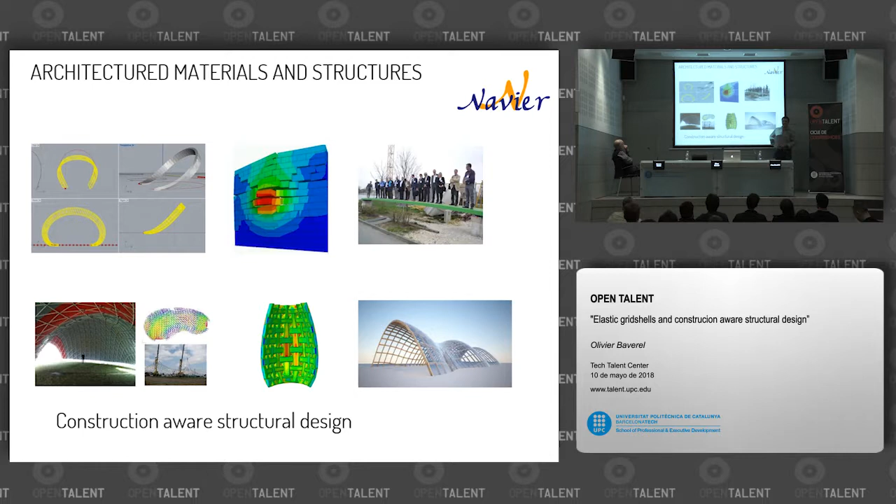So within the Navier lab, there's a team which is called Architectured Materials and Structures, where we work mainly on what we try to call construction-aware structural design. I'm going to detail this, and my presentation will be mainly about this.

So within the École des Ponts, the strength is that we have a lab specialist in structural mechanics, and also in material science, and in life cycle analysis. We have another lab called Gaspard Monge, which is expert in computer science, in vision and artificial intelligence. And we have a company called Al Robotics that is working with us on sensors and controls.

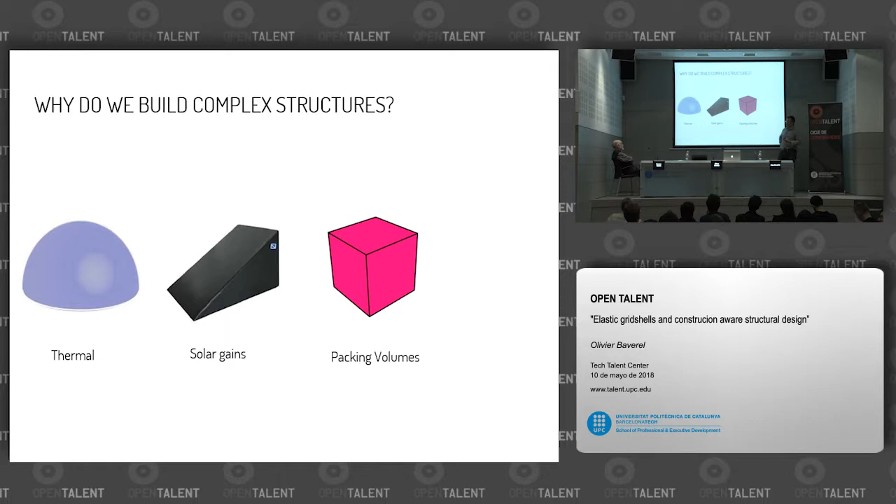So let's go first into why we do complex structures, why we build complex structures. Because obviously making a cube is not the optimum. If we want the structure with the least thermal bridge, the best is to do a hemisphere. If you want to get more solar gain, you should make a 45 degree angle with the south. If you want to pack some volumes, then you'd better do some cubes or parallelepiped rectangles. And if you want to do structure, then life is much simpler if you do tetrahedrons. And of course, having only the optimum of each solution doesn't give you the global optimum, and you have to find a way to find a global optimum.

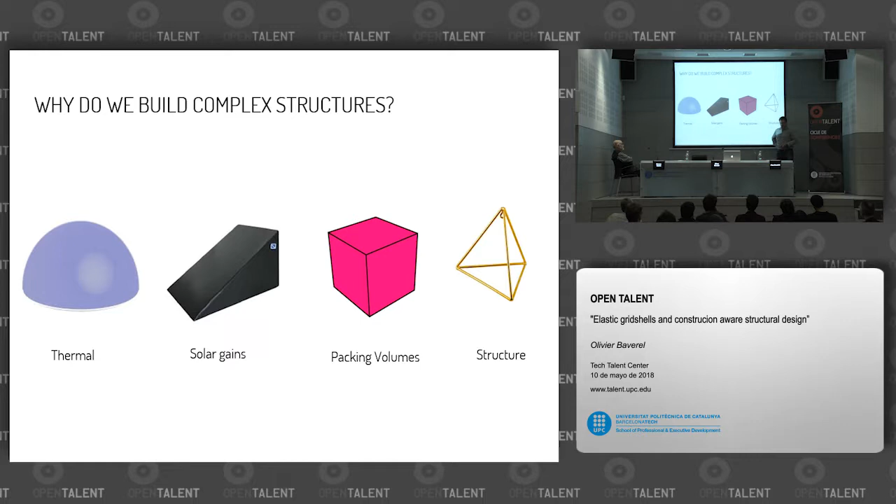And a global optimum for what? Well, it's certainly for sustainability. You all know that our consumption of any material is getting into an exponential curve, and we have to reduce this consumption within a very short time if we want not the planet to survive, but humanity to survive. The planet doesn't care about us. It was there before us, and it will be there after us. It's just a question of humankind.

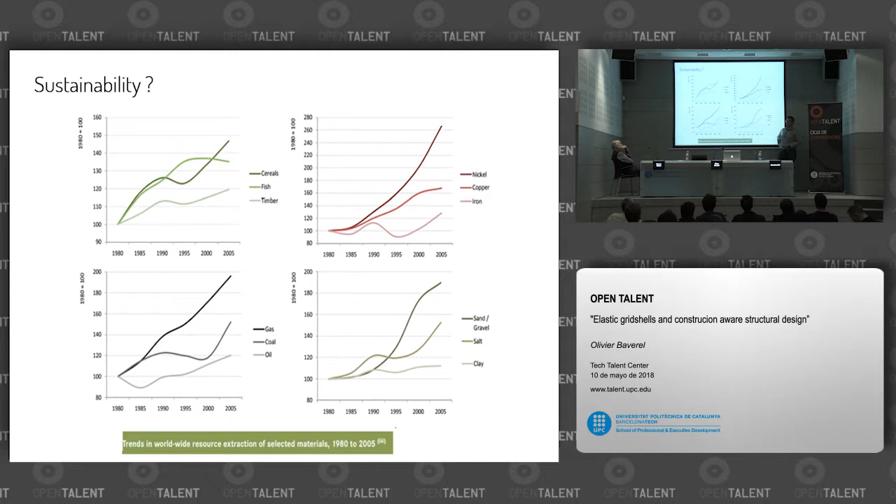So we strongly believe that construction-aware structural design will help. It's not a complete answer to the problem, but it will help to use the resources better.

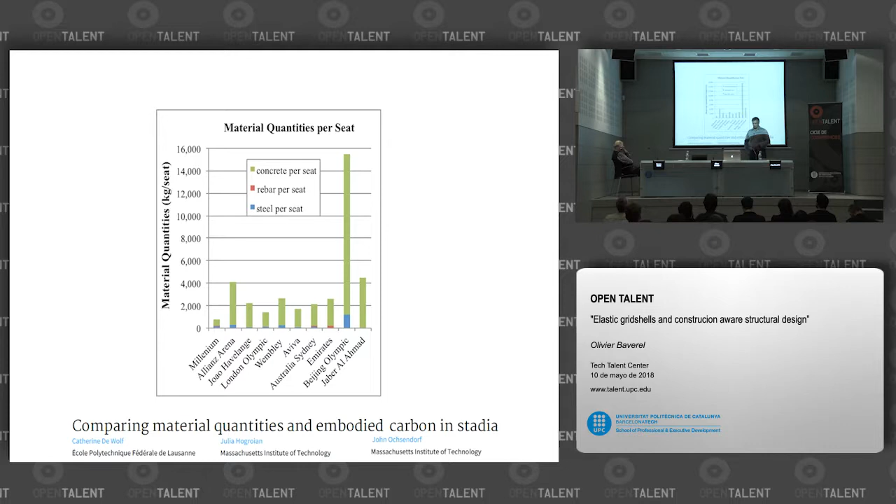Having said that, if we look at a latest publication from Catherine De Wolf from École Polytechnique of Lausanne in Switzerland, she looked at stadia, and she looked at the amount of material used to build the stadia. And you may know the beautiful stadia from the Olympic games of 2008 in Beijing. So in terms of complex structure, we're not yet there in terms of consumption of materials.

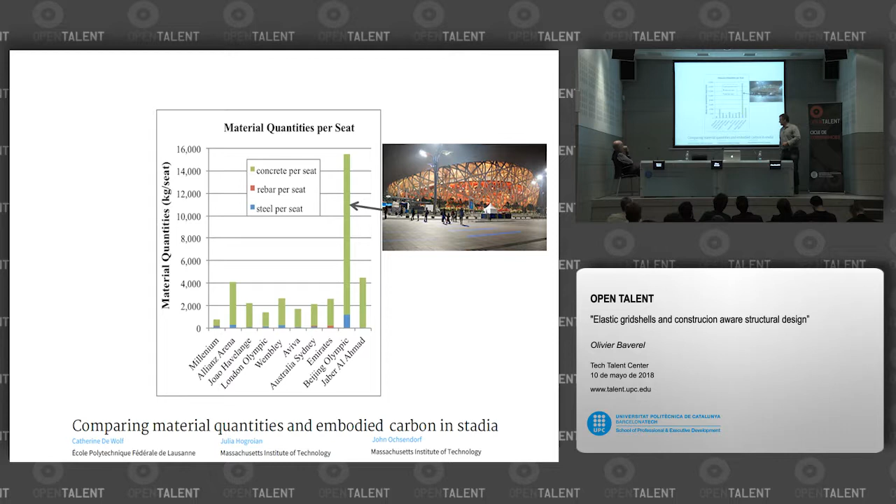Well, if you look at the stadia of 2012 in London, it was far much better. So people understood that using modern tools, you need to get some optimization, not to consume too much materials. Remember, or maybe you are too young, but in 2008, the price of steel in the entire world increased. And all the big companies of Europe lost some money because the price of steel went up due to the building of this stadium.

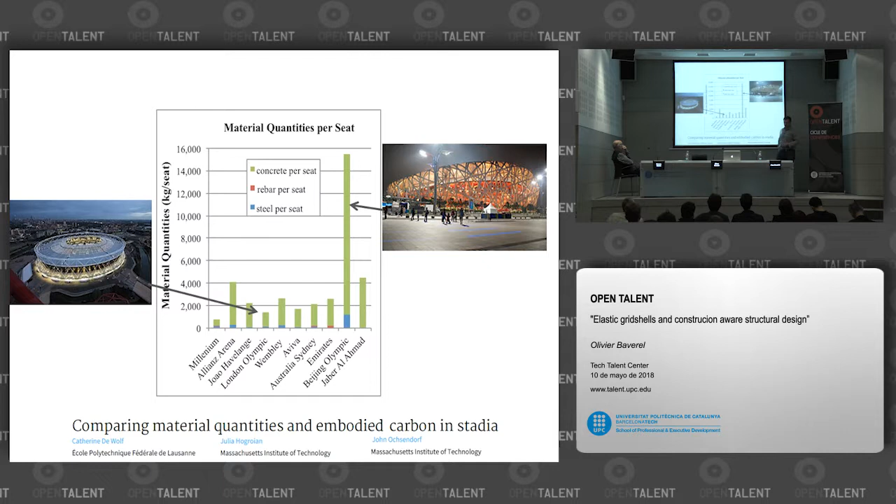I could also show you the CO2 emission graph, and it's the same trend. So our proposal is to investigate better the mechanics of materials and use the materials efficiently. It's also to revisit the roots of geometry, because at the moment we're using tools that are not adapted to what we want to do. And of course, we want to cleverly use digital tools and artificial intelligence. This will be the last part.

We're building and doing many things at the moment, and we're destroying them at the end, getting into raw materials at best, or they get to a dump. Can't we reuse directly elements to make and save and have a better life cycle analysis?

So first, think mechanics of materials. If we look at the first iron bridge that you probably all know, it looks mainly not as a steel bridge, but mostly as a bridge of masonry. So a new material came out, and they copied the solution of the previous materials.

We had to wait 50 years and even more until Navier developed the beam theory equation that you all know. And 50 years after, you had Gustave Eiffel, who built bridges that optimally use the materials, with trusses or even trusses within trusses, to get a really lighter structure. So it took some time to do it, and it was not straightforward.

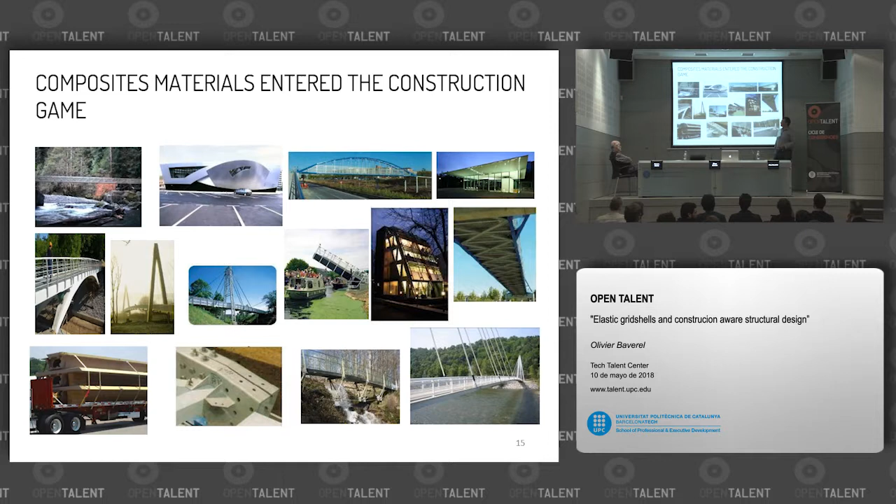If we look nowadays, new materials that came into our industry are composite materials, mainly glass fiber, which is quite cheap, or carbon fiber. But if you zoom into all these details, it's mainly copying steel.

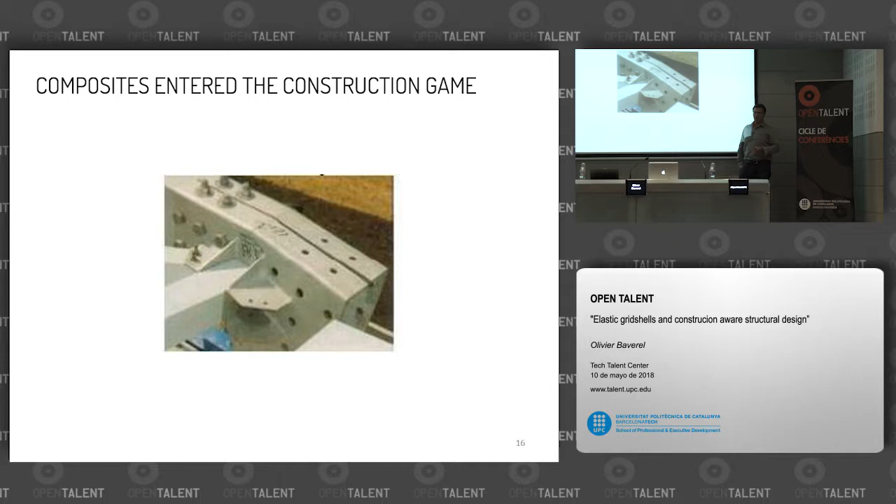But you all know that steel has some fantastic properties, which are elastoplastic, and it's not a brittle material. Composite material is a brittle, fragile material, and not ductile. So you cannot copy straight what is built in steel directly in composite material, or you will never win. Steel will always be better.

But there are some strengths in composite materials: lightness, the capacity of prefabrication. You can integrate some functions, for instance optic fibers, to know what is stress within the structure at any time. And you don't have any problem of corrosion.

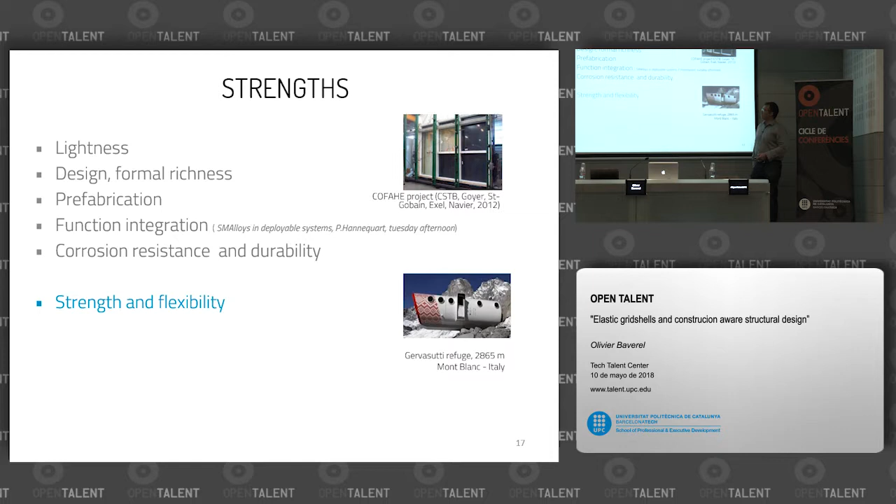But you have to remember that these materials have a low Young modulus. You have to remember that most slender structures made out of steel stand due to the Young modulus, or the rigidity of the material. Here we have a material which is more or less 10 times softer than steel, so you cannot directly compete against steel.

Of course, there are other problems. It's difficult to actually assemble, and there's no ductility, as I mentioned before. So you either copy what is done by steel, and then you will never do better than steel, because the solution provided by steel is optimized for steel. So with composite materials, if you copy steel, you will not do better than steel. You need to find a proper way to use composite materials.

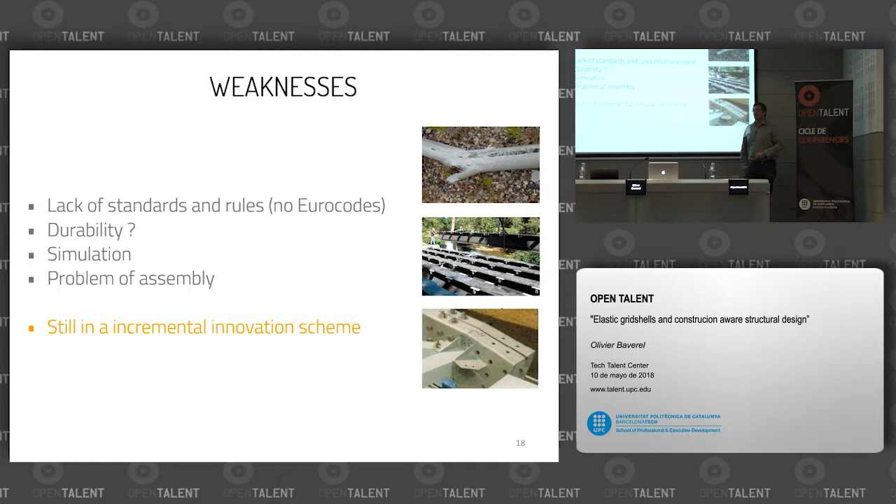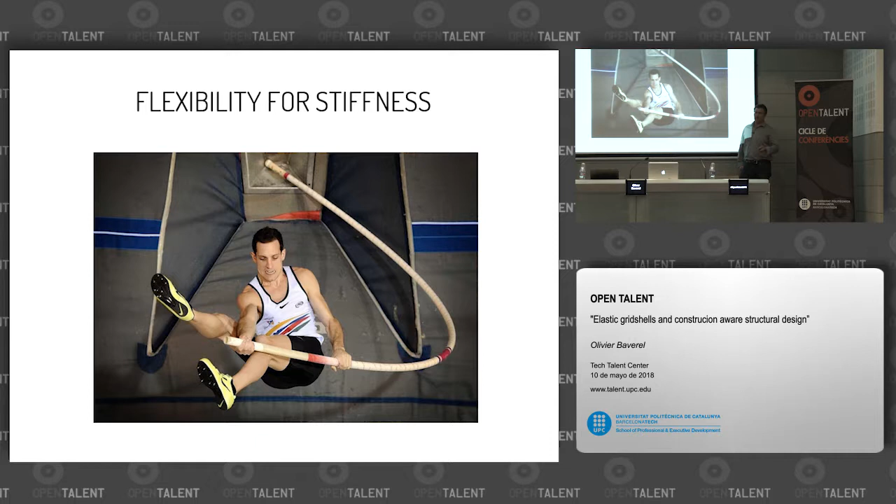So here's an interesting example: you can always try to do pole vault with a steel pole, but it's not going to work. So you have to take advantage of flexibility, certainly for stiffness. One famous solution is to do an elastic grid shell.

As you all know, you start from a flat grid here, which you could look at as a membrane without shear rigidity. This means you can access a vast variety of forms. You get your 3D shape.

Of course, nowadays, tools are available and easily usable to make these forms. And after, you brace the structure. Here you have a structure made of several arches working together, and here you have a shell.

And the shell, by adding only 50% of material, you will have a shell which is between 15 and 20 times stiffer. So you change your structure, and you completely change the stiffness of your structure.

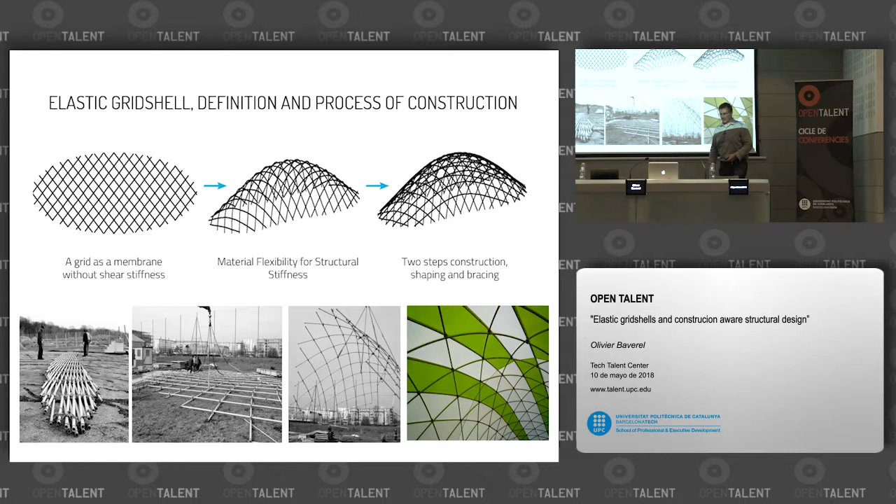So here are some pictures of structures we built in 2005 and 2006. Here it's a crane, but at the beginning we used to lift it by hand, and it was difficult. So in the last 15 years, we had many tries doing some useless things.

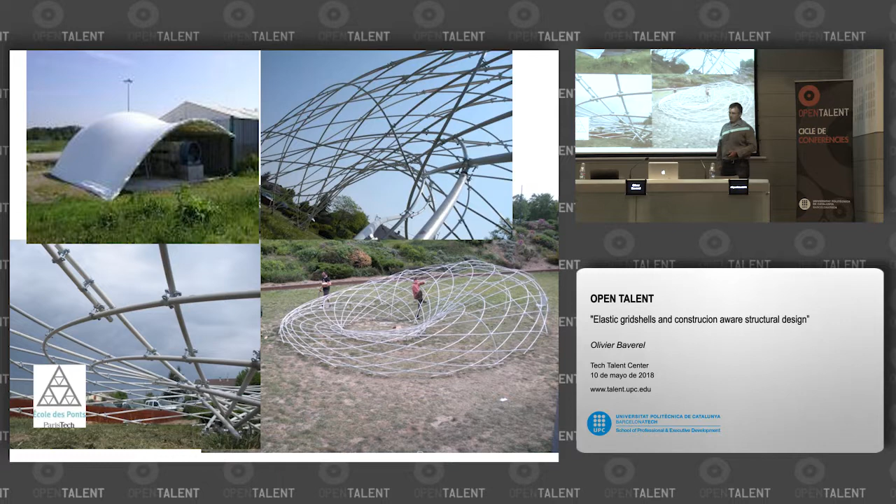So we did many tests here to know actually what is the best, the maximum stress we can allow to these elements. Remember that for those of you who have designed steel structures, you know the yield stress of steel. You put a little coefficient of safety, and then you can design a beam. Here, the coefficient of safety is 3.

It means you use only around 30-35% of the capacity of the material because of many safety coefficients that are needed. So when you look at only the fiber, glass fiber can be 2,000, could be 10 times better than steel in terms of strength. Well, when you make the materials, then it's only twice better than steel. And when you look at the stresses with the coefficient of safety, then it's lower than steel, okay? That's in terms of strength, not in terms of Young modulus.

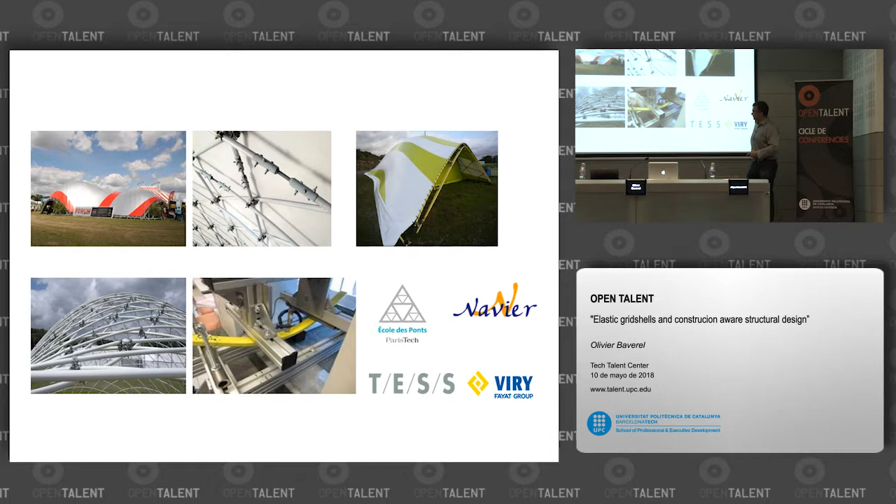So to resume, we did many prototypes. This one is the most famous one we did 10 years ago. We did a real prototype for Solidays Festival in 2011, and we did a temporary cathedral of Créteil in 2013.

We also did many other little tests, for here, a hybrid structural skin. So you know that making a grid and getting a 3D shape is not difficult, but it takes a lot of time to do the bracing because you have to get into the structure and also put a cladding on top of it.

So here there's a grid shell, and on top of it there's a 1.5 centimeter high-strength concrete with our specific formulation from the École des Ponts.

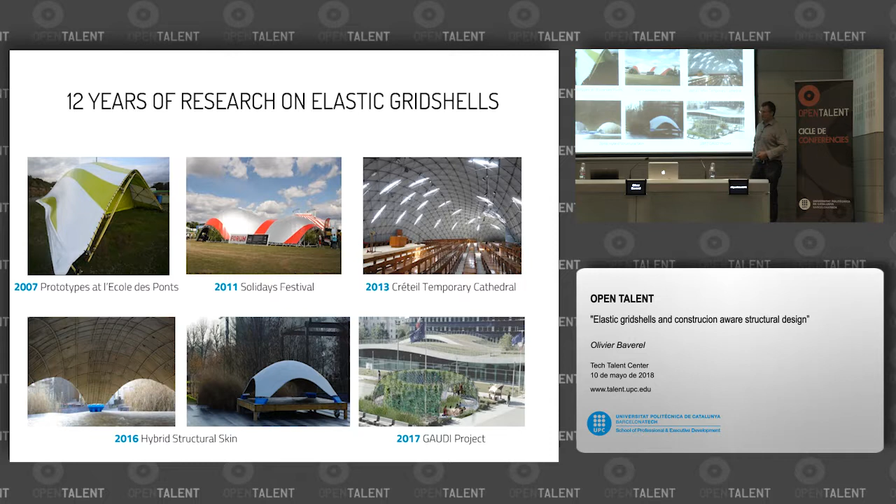Okay, so here's an internal view of the Solidays Festival structure. It's always interesting to see the path of the elements, which is not following geodesic or whatever. And it's also important to know that we span more than 14 meters with a cross-section of 4.2 centimeters in glass fiber.

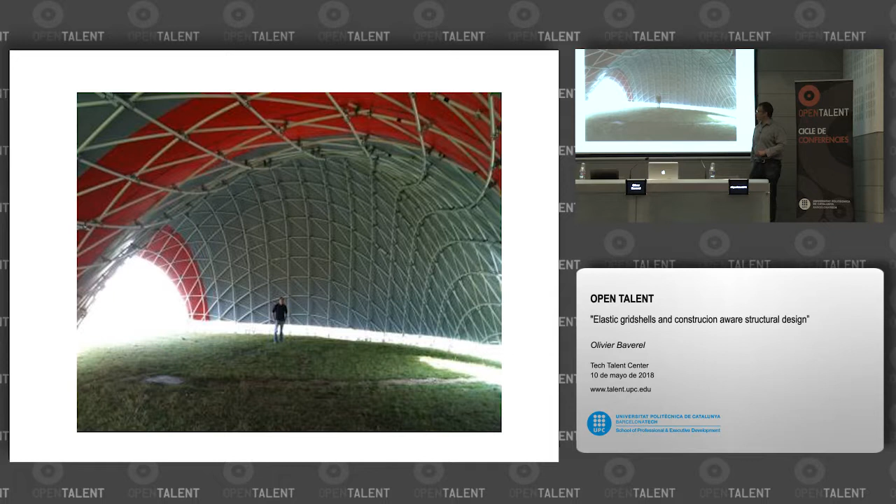So I think it's good to remind you of the design procedure of this structure. It goes in 4 steps. The first step is to get a 3D shape, then mesh it, relax the mesh, and then do a classical structural analysis calculation.

As with many projects, we started to do a mesh on a flat surface and used to push it, and then you'd get an uncontrolled 3D shape. An architect asked us to do a certain geometry, and we told him, well wait, because we have to find a way to get your shape from the flat surface. So you have to do a sort of reverse engineering. And this was not just difficult, it was almost impossible.

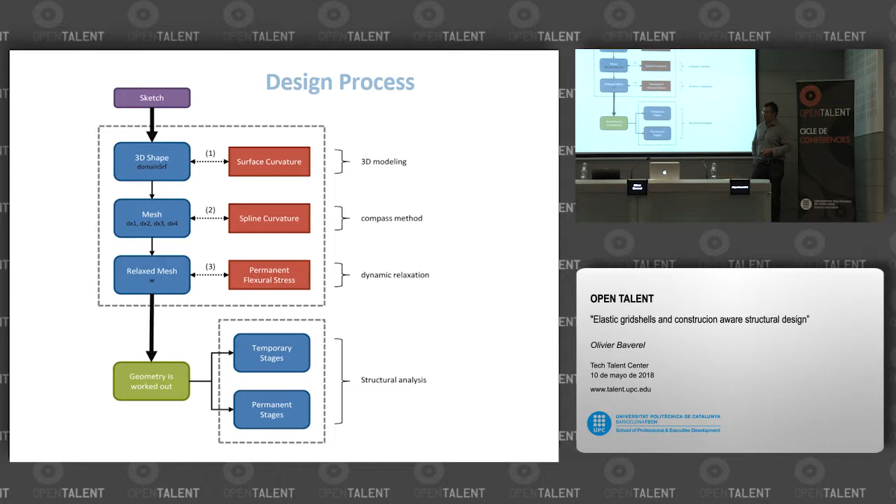So the best way to work is to find a 3D shape given by an architect or a designer, and then mesh it. And this is the main point. So you do a 3-dimensional structure, if you want, or whatever.

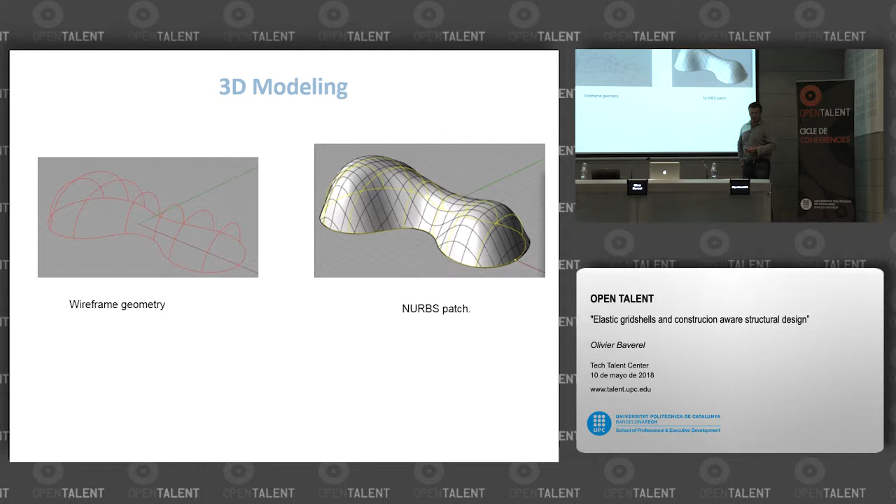But how can you check that this geometry is buildable? If you have to run the whole process, then it's going to take too long. So there's a simple check: it's to look at the global curvature of your structure.

And if you look at the global curvature, knowing the cross-section of the element you expect to use, you know the radius of curvature, or the minimum radius of curvature you can allow. So just by looking at the Gaussian curvature of your structure, you know whether you'll be able to build it or not, or break the element while you put it in shape.

So that's a first step. Without much calculation, you know whether you can build the proposed geometry.

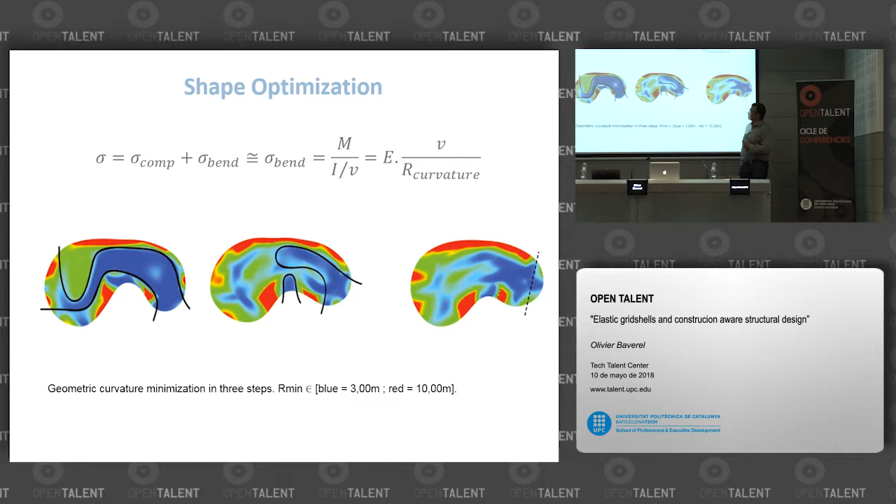Okay, so that's important. Well, this was the first shape. We corrected the shape in order to have a curvature that was not too small, using of course the simple Navier equation.

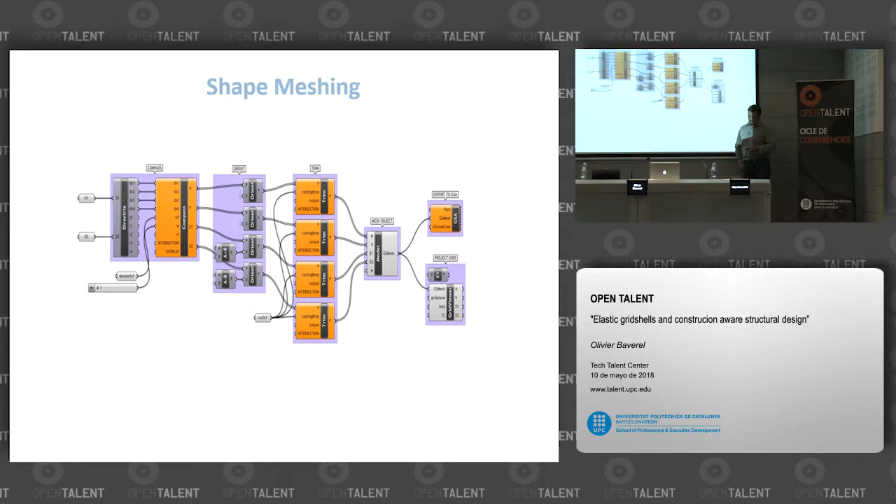That helps to work directly with the designer on the shape you want to use. You can work in real time. And once the shape seems okay, then you have to mesh it. So we made our own tool using the compass method developed by Frei Otto. You choose 2 lines, and then you have to extend the surface you made in order to be able to mesh it.

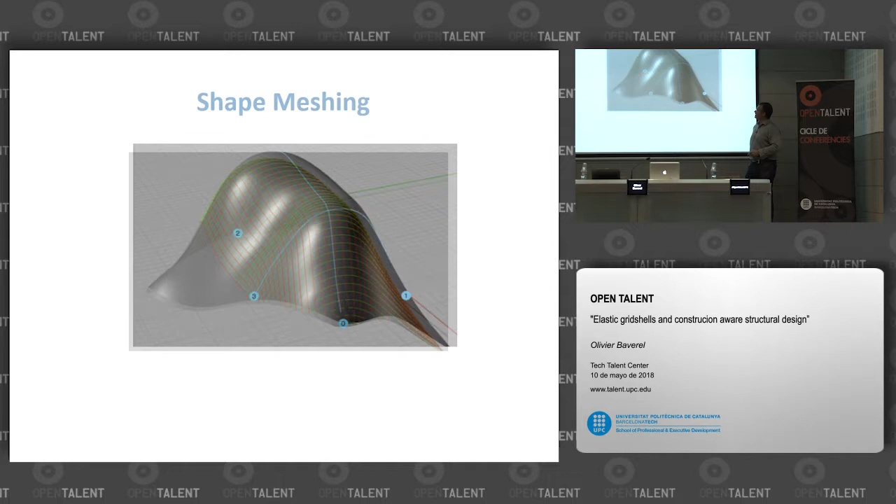Once you mesh it, you cut at the plane you expect to build it, and then you have your structure.

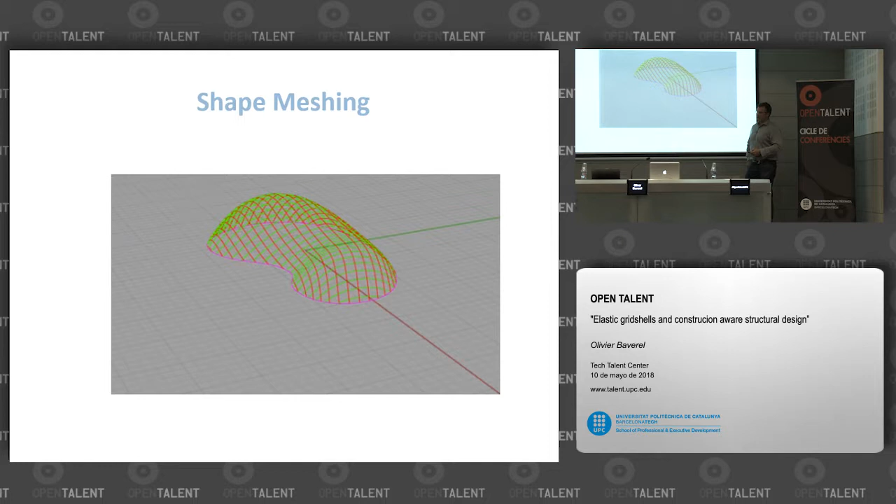You see there's no automatic strategy to mesh your structure. You can choose these 2 first lines, and it will give you a surface that can be meshed or not. Here you see we had a high concentration of bars, and it's completely useless, not interesting at all, so that's why we didn't take this solution. We took this other solution instead, which is far better.

There's no automatic tool yet to find the correct mesh. And an important question is: can I mesh any surface? As you may know, the École des Ponts has many mathematicians working with us, so we did a PhD on this topic: can I mesh any surface?

You have to know it's called a Chebyshev net. Chebyshev was a mathematician working for the Russian army, and he was working on clothes, how to cut the clothes. Because at the end, your clothing is a grid shell. And you can see that you cannot do any surface with a grid shell, because sometimes you have to sew.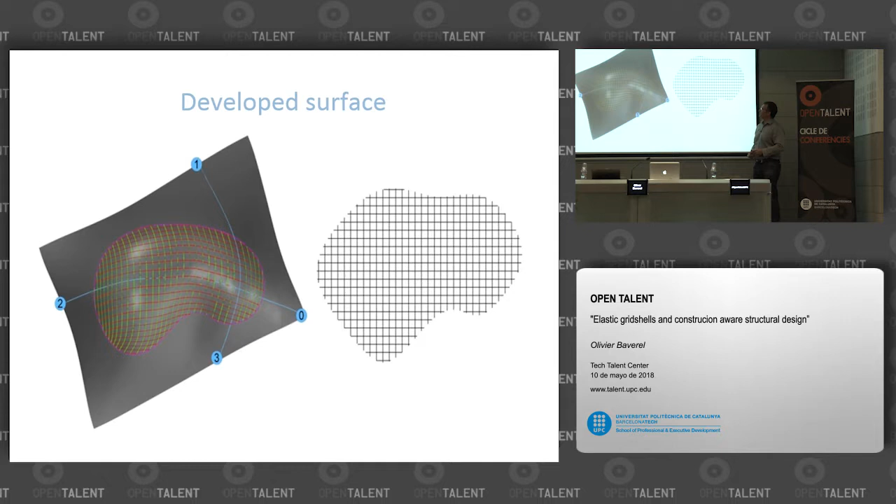After you do that, you have to relax the energy, the bending energy you have within the structure. I won't show the step, but usually the structure does not move too much. Once you have relaxed the bending energy, then you can do a structural analysis, taking into account the bending energy you already have due to the bending.

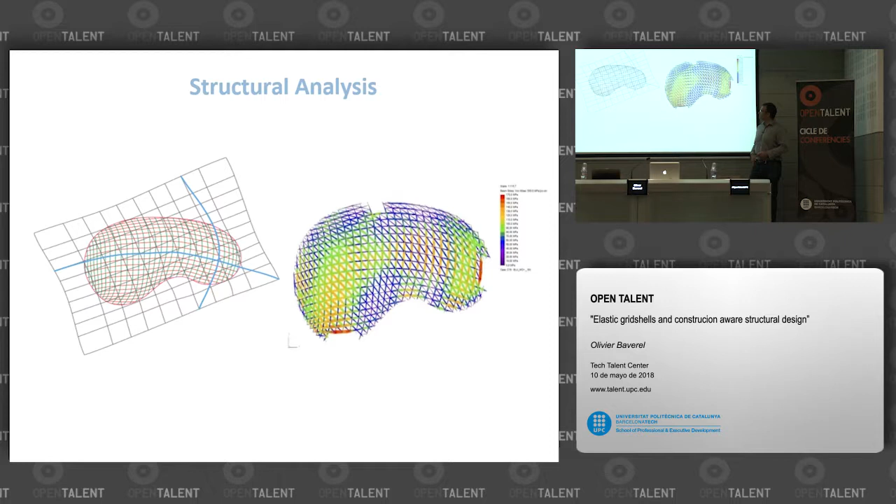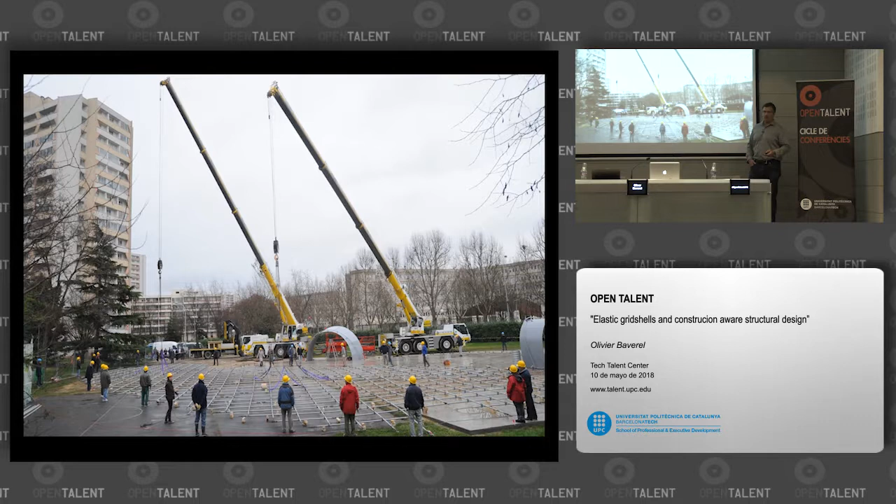So after that you have to build it. You build the structure flat. You land 2 big cranes, 30-ton cranes. You see on site, all the foundations are already there. All the places where we have to put the elements is known. So you lift the structure with the 2 cranes.

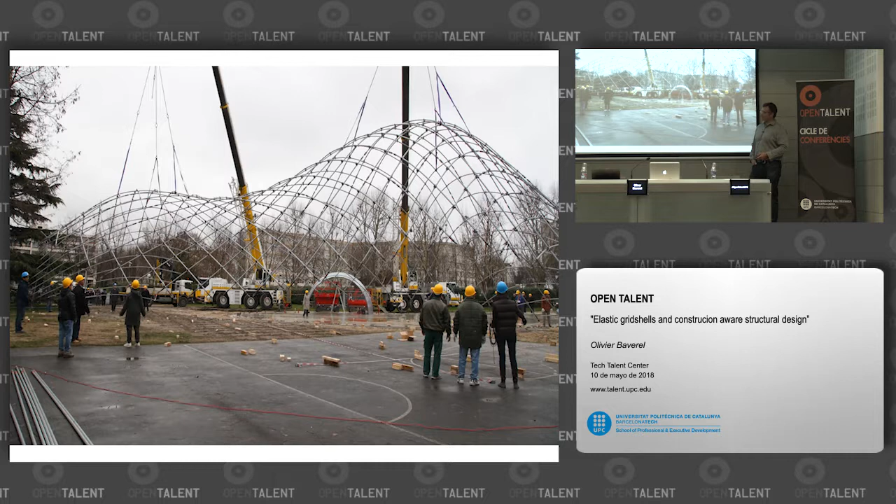We did some calculation before, of course, to get more or less the shape. And if you used to be a rugby player, then it's quite easy - you have to push, explain this part has to go to this foundation. And as you get some bending energy, sometimes you have to push a lot. But it more or less works.

And of course, at the end, you have this. Once again, this structure was built for the Cathedral of Créteil. You have a span of more than 15 meters, and once again with a cross-section of 4.2 centimeters. It was more or less the limit of what you can expect with this cross-section. It's a hollow cross-section, only 2 millimeters thick.

The couplers are swivel couplers, well known in the scaffolding industry. We developed all the tools quite a long time ago to find this shape and do the calculation. It was a PhD of Cyril Douthe, and he graduated in 2007.

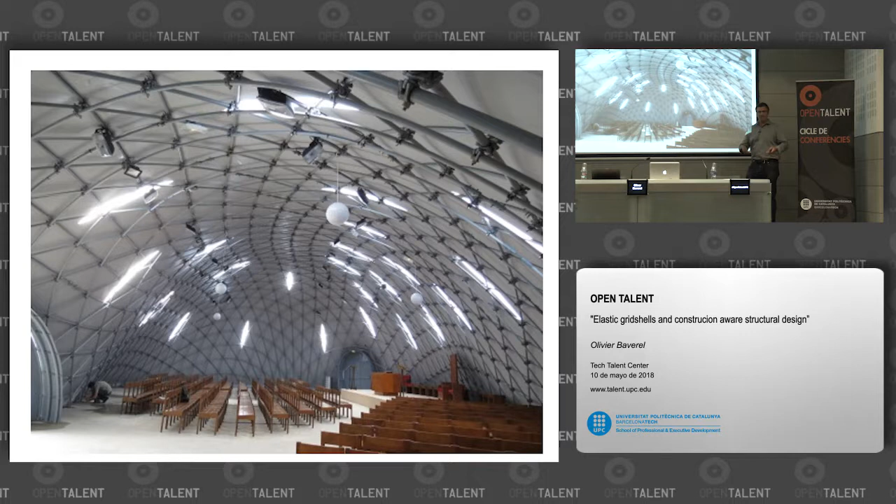As typical French, we had all the tools and we didn't release anything. And Daniel Piker retook the work that we had already taken from Chris Williams, and he made the fantastic tool called Kangaroo.

So we tried to go further, and of course, the model we used to make only accounts for bending according to one axis. Here, by taking a rectangular cross-section, you have to take the 2 axes of inertia and also torsion. So taking torsion into account is quite a complex task.

This was our latest PhD. So once again, we have a tool. We haven't released it yet, hopefully soon. And it allows you to perfectly take torsion into account.

Our colleagues from IBOIS EPFL already worked on this topic. Some students have shown some work, and it was a collaborative work with us and Sina Nabaei, who did his PhD at that time.

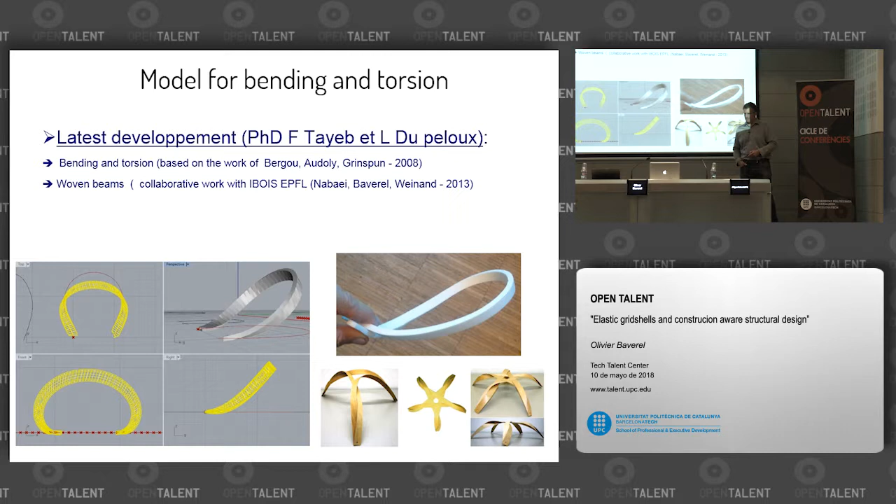So constructibility is also mathematics. You have to know that if you want to put a Chebyshev net on a surface, there are some limitations - the integral of Gaussian curvature, I don't know if you see what I mean.

The maximum Gaussian integral of curvature that you can get is 2 pi. I shall remind you that for a sphere, the integral of curvature is 4 pi. So let's say you cannot cover any shape with more than 2 pi integral of curvature, except for the sphere, where you can go to more than the hemisphere, but you cannot do the full sphere anyway.

That was a big question, and we found many papers saying no, it's not possible. So we said, well, the PhD is finished, we cannot do it. So we said, well, if we cannot do this, we might be able to cover more by doing some patches or by doing some singularities.

Doing some singularities means here the valency of the node - the number of elements that come to the node - is not 4. Here you see a valency which is 6. Here you see a valency which is a lot, more than 40. And here, so you can find the singularities.

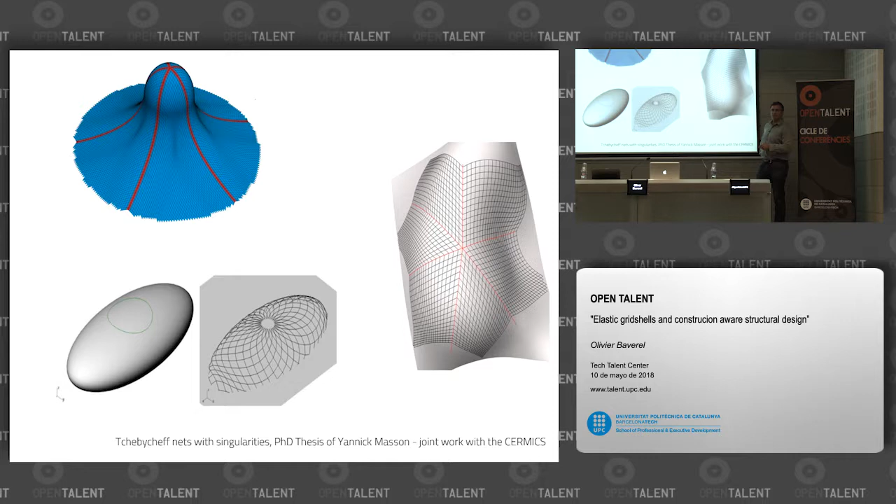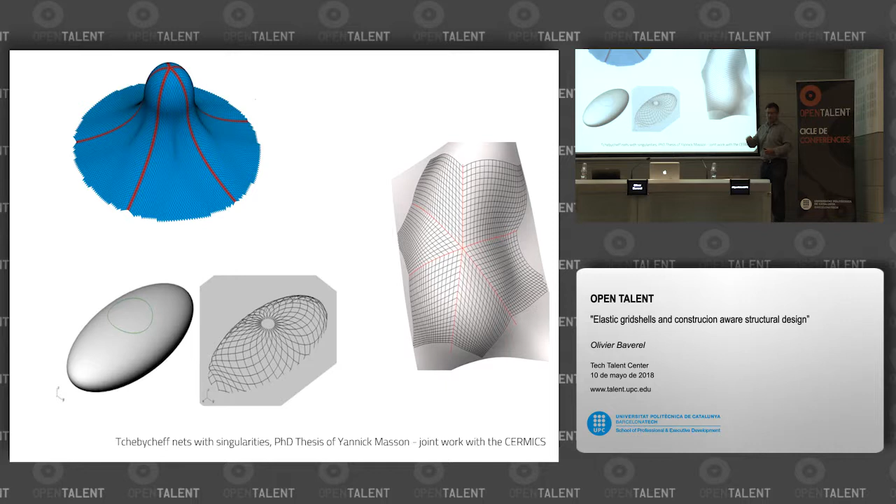So here we can see clearly that we could do, within the same principle, a sort of tube. Here the tube would be elliptic, with a certain organization of the elements. Then with one singularity, you could get the 3-dimensional shape.

It's quite promising, we obviously try it, but if you consider that it's a pin connection between the patches, when you release the bending energy, you get something which is not smooth—more like a polyhedral form.

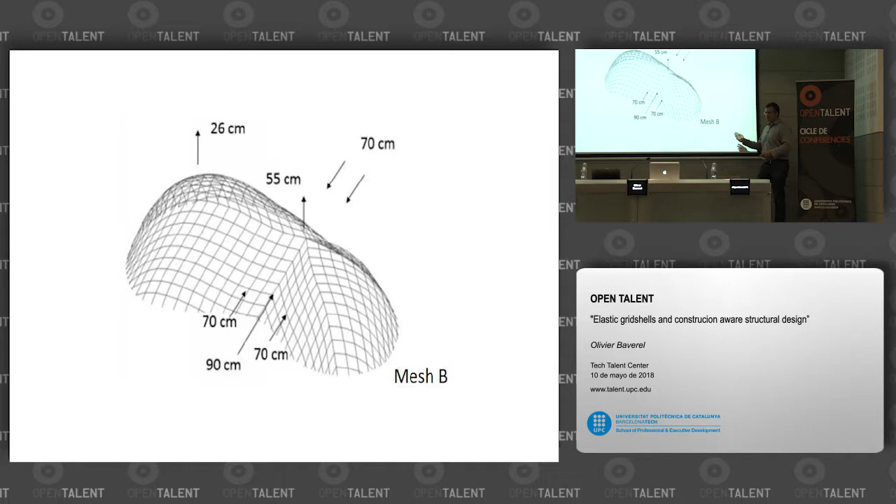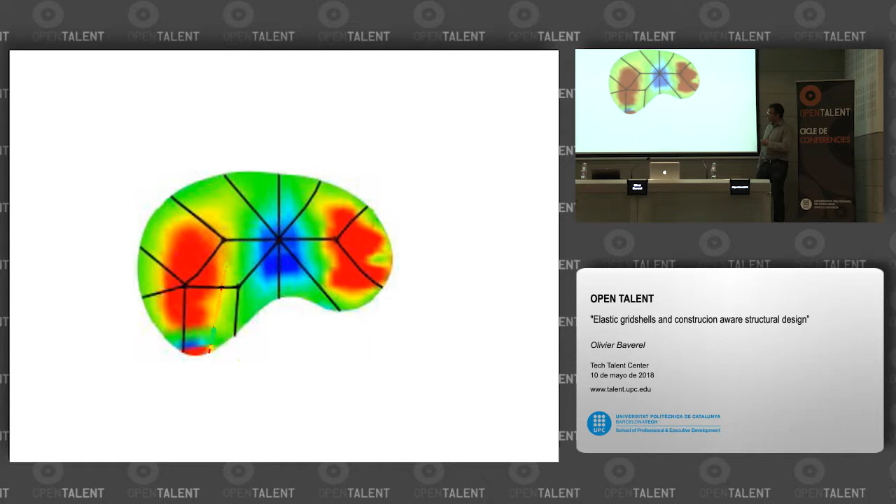So we did some work, and we're going to soon release a paper. We took the Solidays Festival structure and tried to match it with some patches in order to get lower bending energy into the elements. So this is the patch and the mesh that we built.

So I carry on. You all know that the biggest value we can get out of a project is certainly in the concept and design part, and it's all in the parametric design phase. I would call it traditional BIM—what is good for production and operation. But if your project is not good, then even if you're the best BIM manager in the world, your project will remain not good.

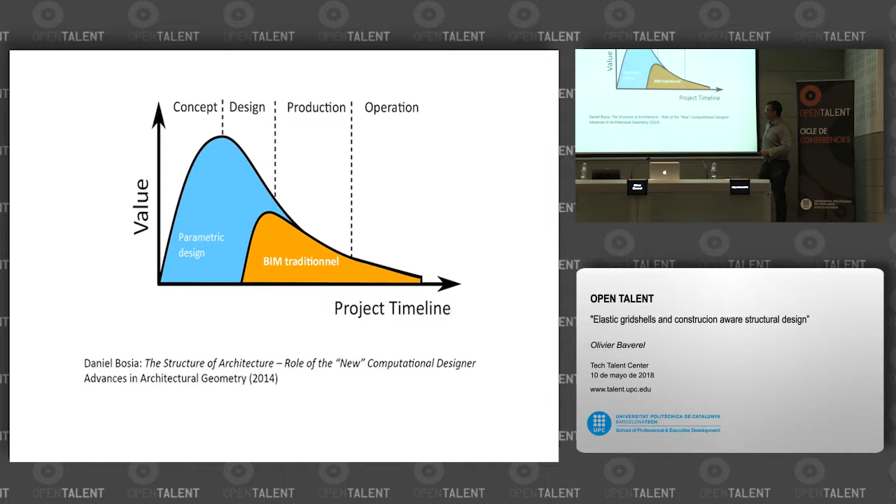So this is the important part of the project. I don't have to convince you. But we have a problem.

You see here, it's a Citroën DS that was designed in 1957, where all the algorithms you're using, most of the algorithms you use at the moment in NURBS tools, come from. The algorithm was proposed by de Casteljau. As he was working for Citroën, a private company, he couldn't publish his work. It's Bézier, who was working for Renault, a public company at that time, who could publish. You all know the Bézier curve, but at the end, it's more really the de Casteljau curve that we use.

But there's something a bit strange: we're using algorithms developed by the automotive industry. The automotive industry doesn't have the same requirements as we have.

If you want to do this part of the structure, it's quite simple. You design it, you make a press, you put 30 tons on top of it, you have your sheet of metal, and then you have the form. For a large building, we don't have such a press, and it's built with parts of elements. So our strategy of construction is completely different to building a car.

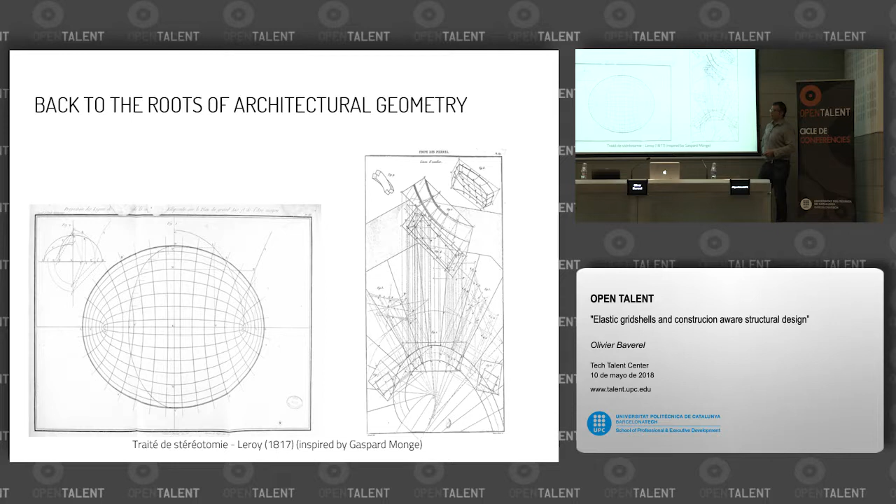So if we look nowadays, constructions are very nice architecturally. But here you see we have a valency of 6 within the grid. If you make a mesh with a valency of 6 and you start to give it a thickness, then it's not possible to get a structure without nodes, without torsions. You will always end up with nodes this way, unless you make a sphere.

If you make a sphere, there's a very easy way to do it. You do just a scaling, and then you have nodes that don't get any problem. But as soon as you have a change of curvature, then you cannot scale it. It won't work.

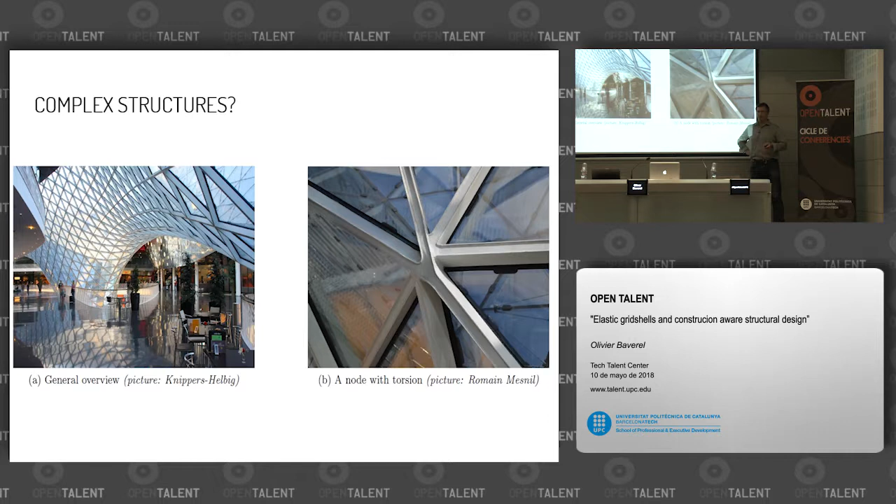So remember this: having a structure, having a form, having a mesh is very difficult, and you really need certain properties to actually make it buildable. This is all the work of Pottmann, who did very interesting work on optimization. You give him a mesh, he will optimize it in order to have quadrangular panels, nodes without torsion, and all these things. But the big question is, can we have surfaces that are directly buildable without optimization?

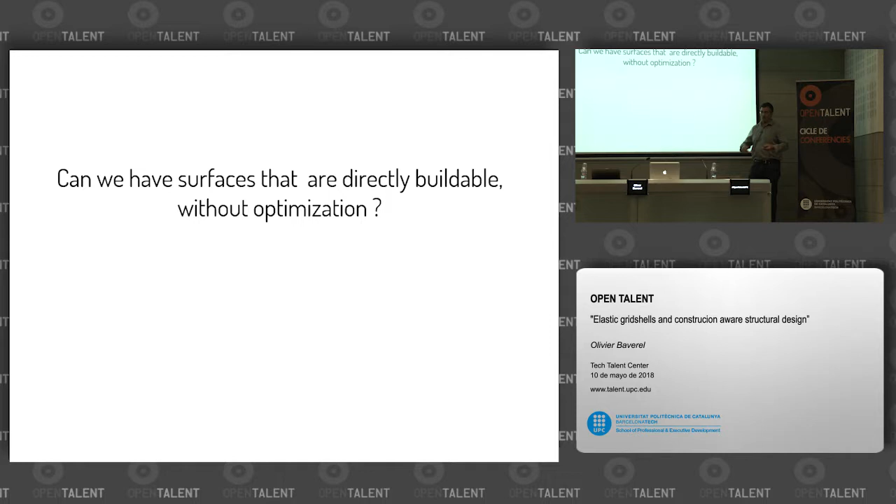You see, you need to be able to make things in real time without the help of a geometer, otherwise it's not possible to design. So the answer is yes.

Just as an example, you can reinterpret the work of the old masters just by taking two lines here, the blue one and the green one, the orange one. By simple geometry, you know the coordinates of 3 points. They can describe a plane, so it's quite easy to find the coordinate of the 4th point. And all these elements are planar.

So we called it, it was a PhD of Romain Mesnil, and we called it the marionette mesh. It's very light, very simple for a designer. You choose 2 lines and you get a straightforward quadrangular mesh.

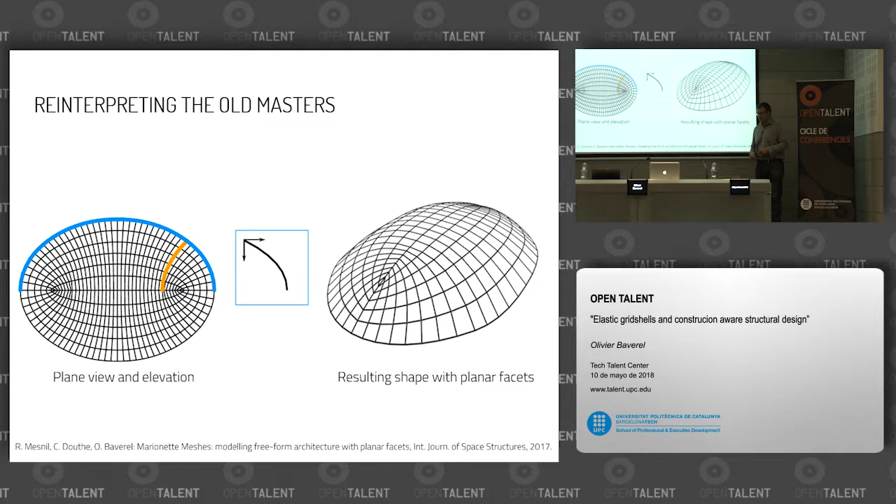As you have almost a real-time tool, you can easily do optimization. And also, not only can you do fast calculation, but this way you can have a space of research, of search, which is much higher than with only NURBS.

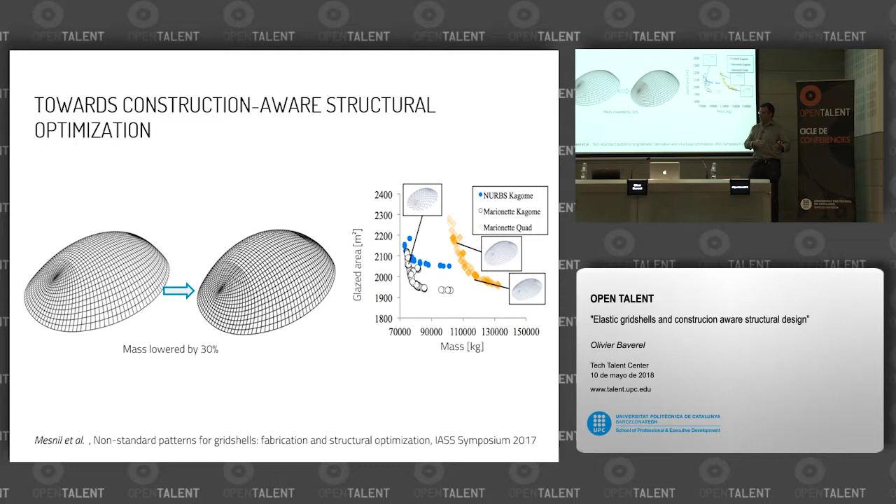Remember, NURBS is a polynomial equation that you use, and you cannot make any surface with it. Okay, you cannot do any surface. Here, the space of research is higher than NURBS. So the optimum you will find structurally has a chance to be better, just because your space of research is higher.

Also, when you start to use NURBS, it's very difficult to do a crease, like here. It's not so simple. With the algorithm I just showed, it's just straightforward.

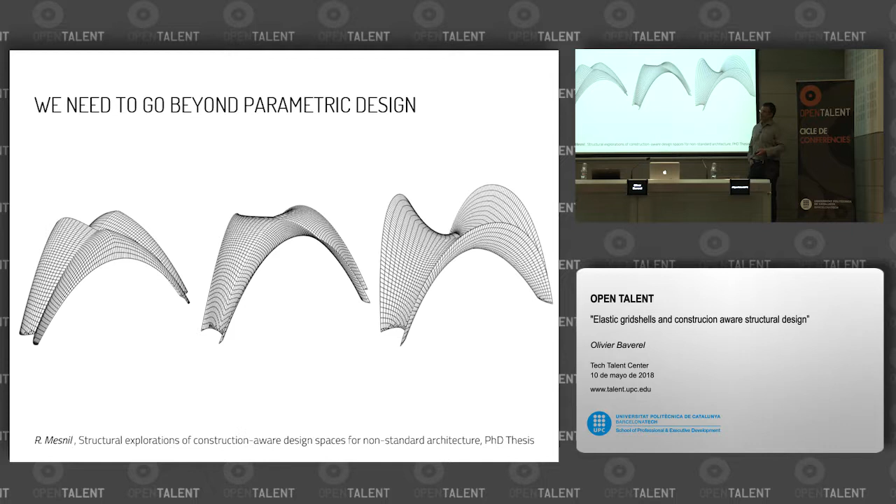But here I was speaking about geometry, and I think we have to go beyond this, to think in terms of topology. Depending on the structure you want to build, and with certain particularities you would have—for instance, you want a point here, an opening here—what should be the mesh you should have?

So we're developing a PhD at the moment with Philippe Block and ETH Zurich on this topic. It's sort of topological finding to help the designer, according to what he wants in terms of shell and what particulars he wants. He will have a mesh according to the topology he's looking for. So that's, I think, very promising. We're developing a tool at the moment.

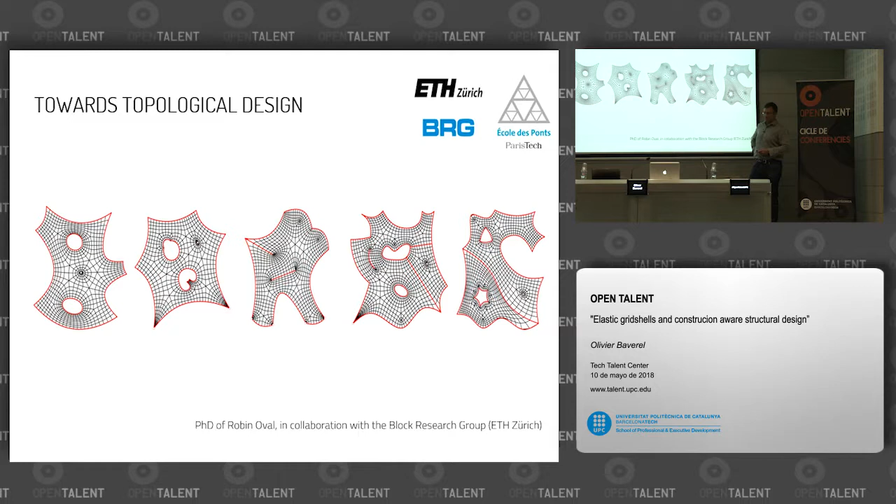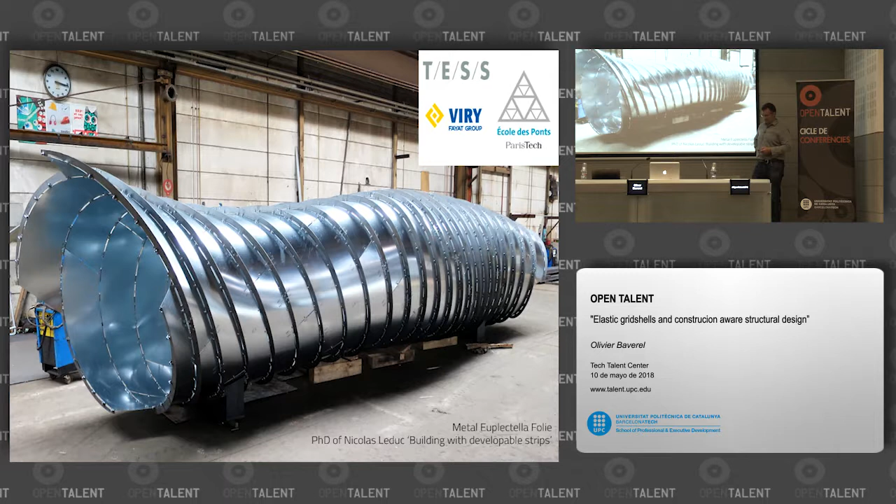Another PhD is with the company Viry and the consultant TESS. Here, it's about how to build with developable strips. There are many tools already available, but the idea here is to really well understand the discrete differential geometry problem, in order to be able to see directly, from the strip you're building on the floor, the three-dimensional shape you're going to get. So here's an example of what we're able to do.

And the last one, which is quite interesting in terms of surfaces, are the constant mean curvature surfaces. Mean surface means it's the sum of the two radii of the surface you're studying. And if it's constant, there's of course the minimal surfaces, but there's also all the inflatable surfaces.

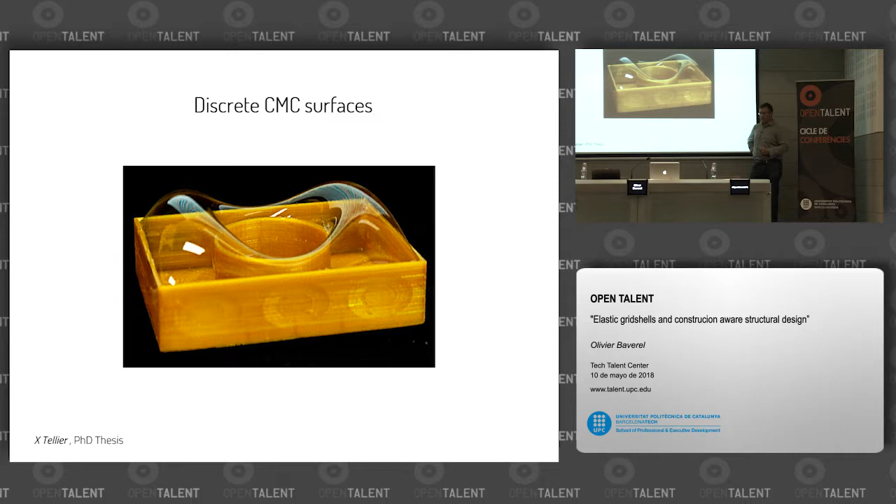If you look at this type of structure, they are fantastic in terms of buildability. You have nodes without torsion. You have planar elements. You have the thickness—you see, it means you are edge offset. You know all these terms: edge offset, the edge offset is the same. In one direction, they're all the same, meaning these elements are the same height, and all of these are the same height as well. So you have many interesting properties as a builder using this type of surface.

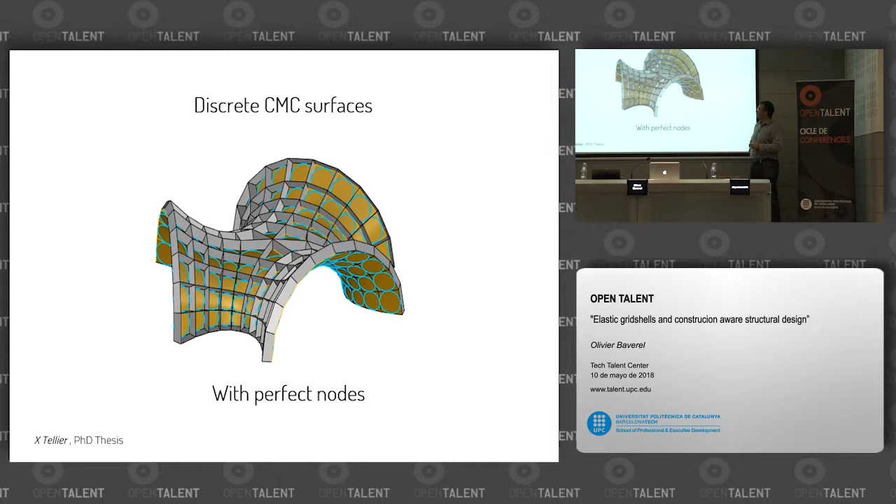And also what is interesting is that you can use it in many different boundary conditions. So we call them perfect nodes, the ones without torsion that are edge offset. So that was about mathematics.

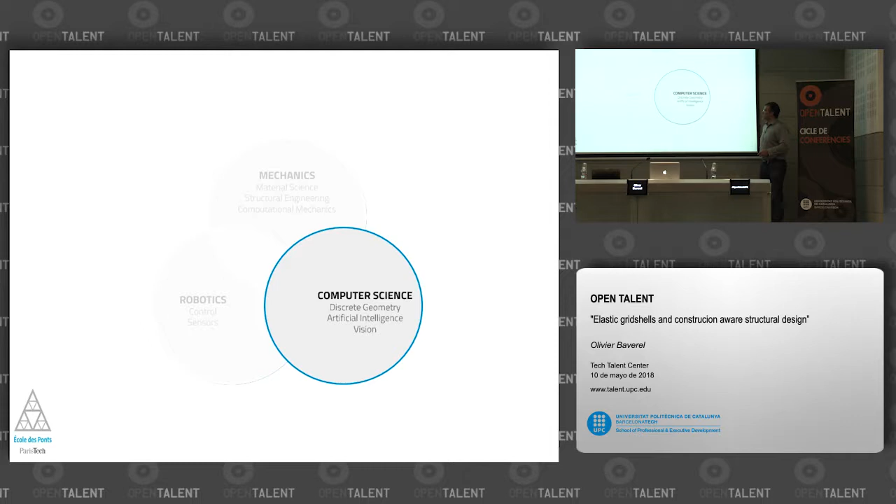Now I'll go a bit faster. I'll speak quickly on computer science and robotics. There's a big question on how digital tools and robots may help. So we have some facilities at the École des Ponts: 2 robots, one on a track and a static 6-axis robot.

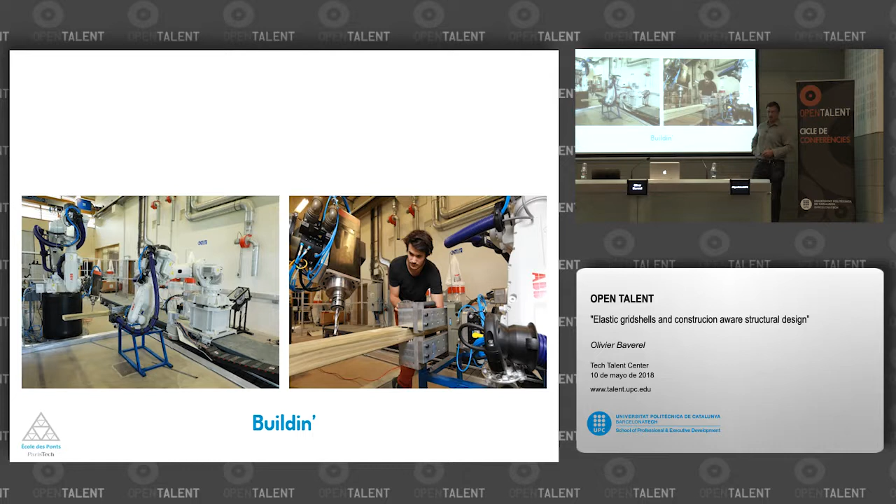I will show you. We have another robot setup to do 3D printing, and we're trying to run some 3D printing differently from what we usually see. We're working with a startup company called XtreeE. The idea here is to use 2 robots, one with foam and another one that's going to print, in order to make directly a space frame, so as not to use too much material.

You all know that 3D concrete printing costs a lot of money. It's very often high-strength concrete. So if you want to have a life cycle analysis which is acceptable, you have to use less of it. And you all know that the problem of 3D printing at the moment is reinforcement. It's not compatible with Eurocode 2 at the moment, so it means you cannot do much. You have to reinforce them.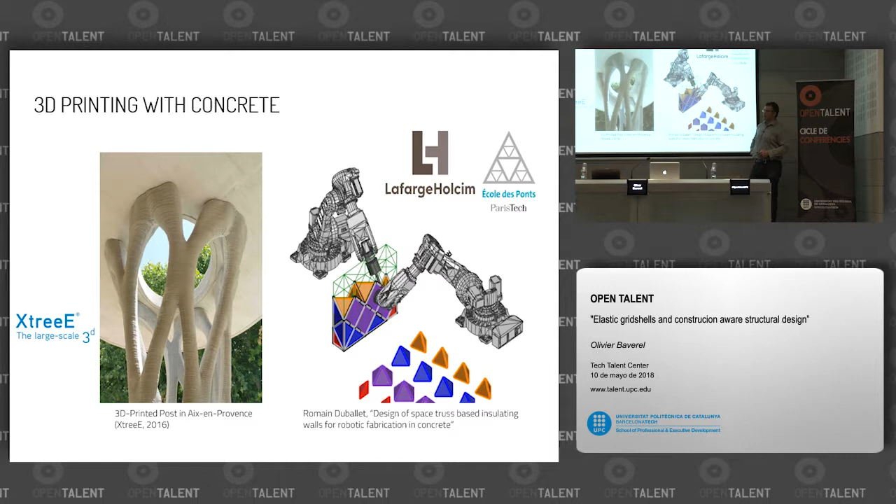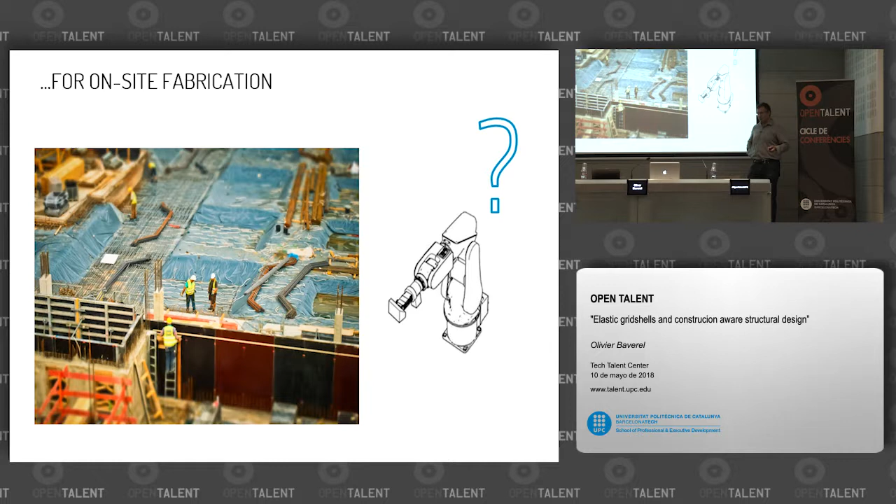So we need smarter and adaptive robots on site. I don't have any answer yet, there's plenty of work to do. We have to take the best of both worlds, robotics and humans. I don't think you will have only robots on sites, it may not be the most efficient solution.

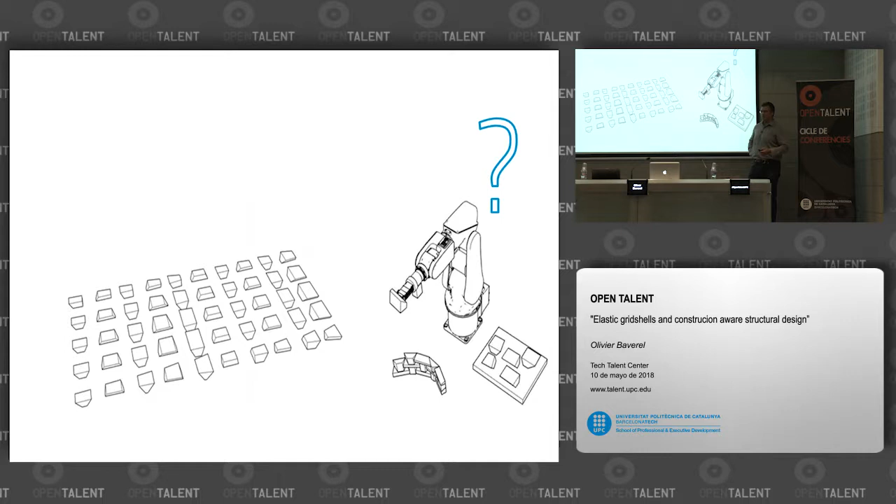So we had a PhD, I'll go quickly on this, asking: can a robot recognize some elements and directly pick them to build a structure? So we used artificial intelligence, neural networks. I was not an expert, well, I'm still not yet an expert. But what is amazing is that you can teach the robot.

You show him, here's the robot, here's the cube he has to pick. You create numerical pictures, something like 500,000 numerical pictures, and he's learning from these pictures. After learning it, he's able to pick up the structure. I have a film but it's too slow, I won't show you, but he is able to pick 5 blocks.

You have some blocks, you put them on the floor. There are 3 cameras, and he takes some pictures. As he's seen 500,000 pictures before, he knows how to recognize where the blocks are. And what's amazing is he learned not in a real way, he learned numerically with artificial pictures. Because if you had to do 500,000 real tests, it would take your whole professional life, so it's not efficient. But this way, he can learn very quickly.

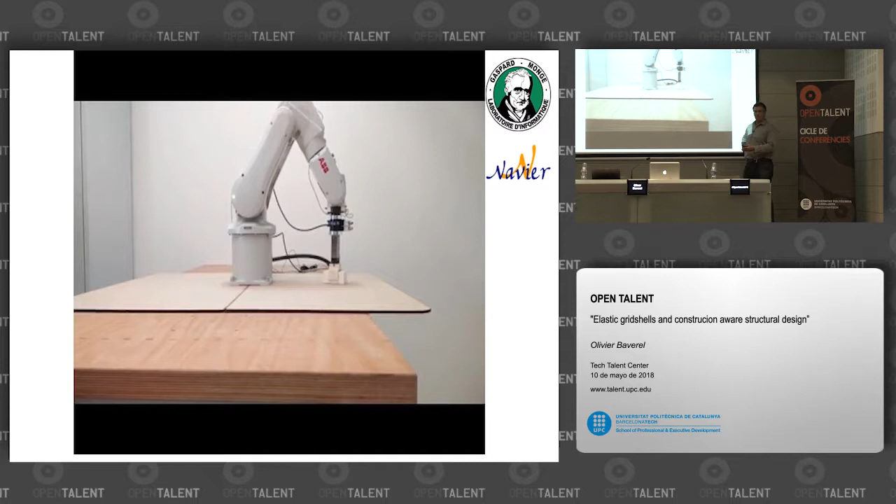So: materials, mathematics, and robots.

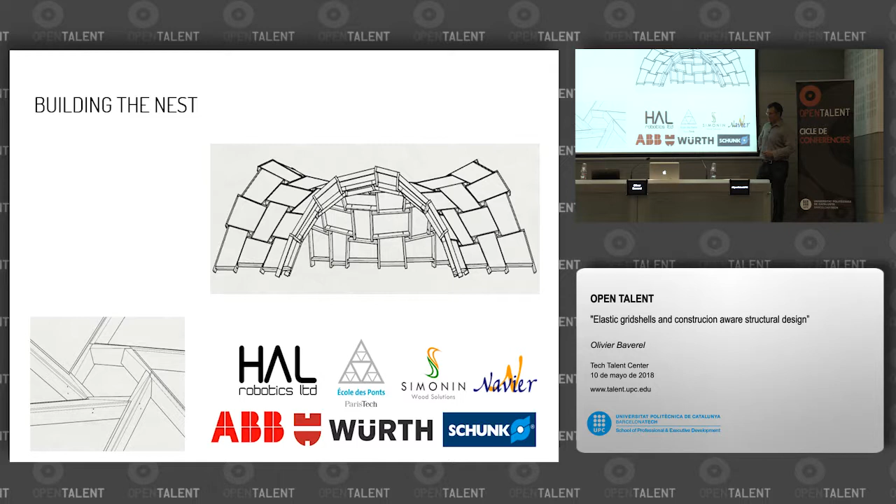We made lastly a new pavilion, reusing some known strategies with some partners. ABB, you know, it's a robot maker. Würth is a screw maker and more than this, of course. Schunk is a supplier of any system that you can add to your robots. And Simonin is an expert in wood manufacturing in the Jura region, next to the Swiss border. So here's a final view of the project.

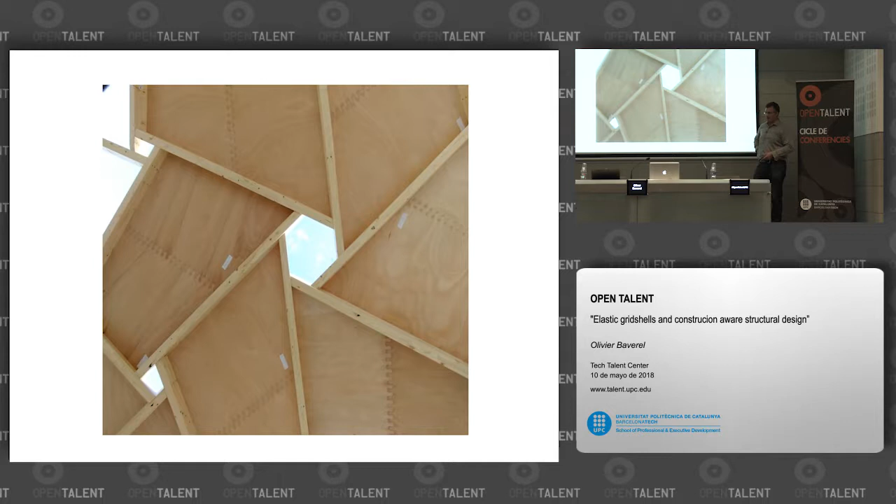Some people call it a reciprocal structure. We call it Nexorade. What is quite new in the system is we developed a new algorithm: from a reference surface you make a PQ mesh, planar quadrangular mesh, and then you transform it into a Nexorade just by translation, because translation is a linear system of equations compared to rotation, which is non-linear. After that you get not only a Nexorade, a reciprocal structure, but a shell Nexorade, because these elements are still planar. That's an important point: your structure can behave as a shell.

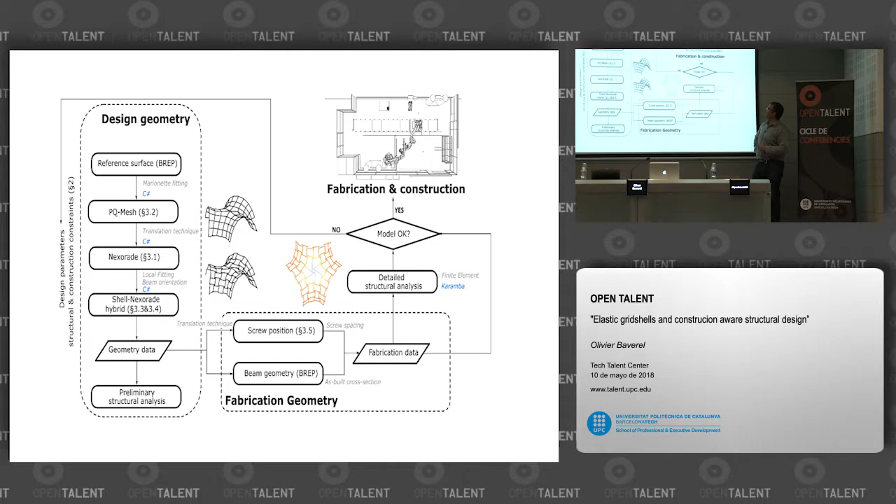After that you get all the screw positions, the beam geometry, fabrication data, and you go for it. So here's the site. We have a robot on a track which is picking a beam, going to cut it to the correct dimension, make the hole for the screw, and it's going to be milled by this robot. So it's a 13 degrees of freedom system working together.

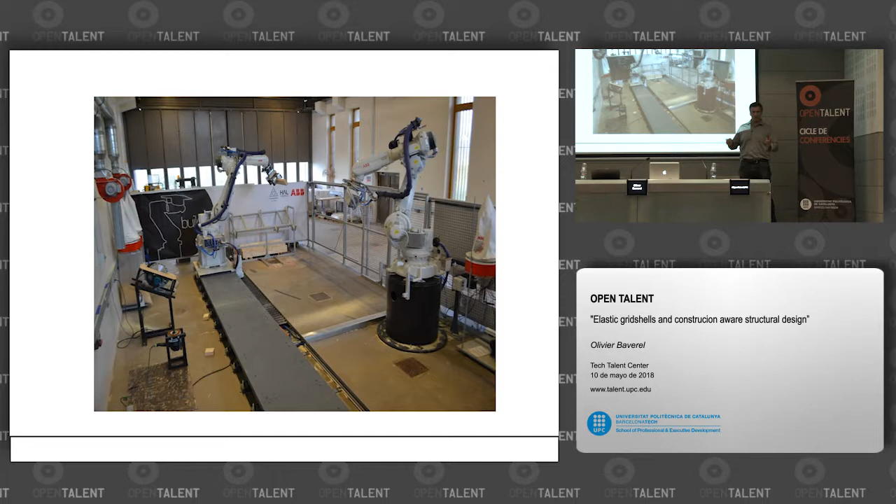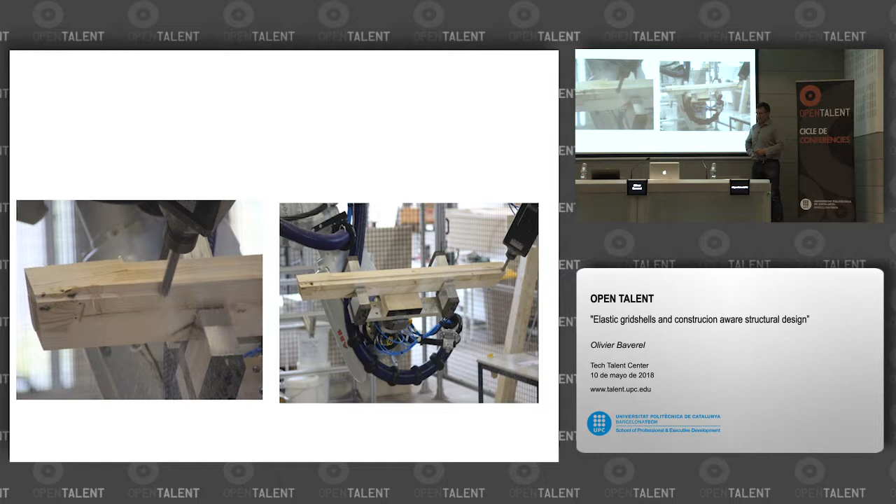It's been a nightmare to explain to the two robots that they were in the same world, okay? But they finally accepted it. So here you see one robot holding the beam and the other one milling. The screwing process is extremely simple, it's the advantage of this blown-up node.

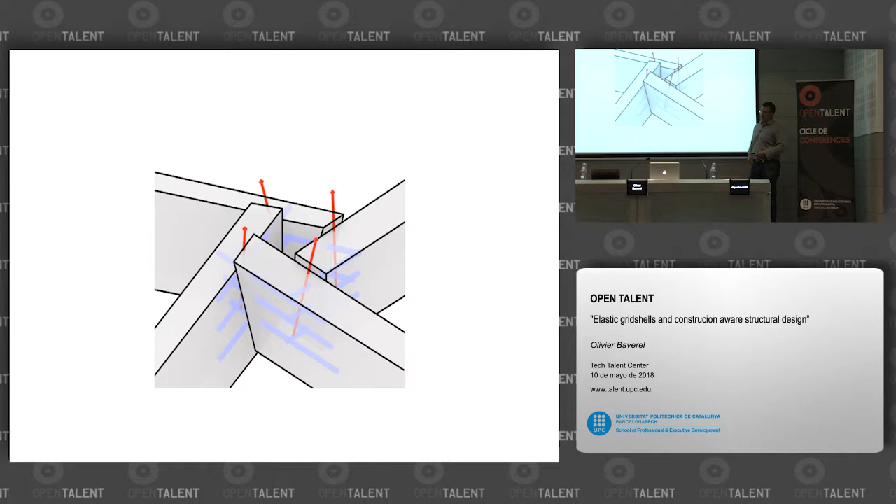So here's the team, the team of students that worked on this.

One last element is the question of reusing elements, construction elements. I'll show you only one example: how to reuse bicycle rims to make a truss. It really works well. We were stupid because we used OSB here, and it failed in tension. You have more than 1 ton of bricks on top of it.

But there's an interesting question. We produce 4 billion soda cans per day, 4 billion, it's a piece of engineering. The wall is only 80 microns thick, and at best we transform it back into raw materials, or maybe it goes to the oven. But can't we reuse the technology that was embedded into this structure? That's an interesting question. As we live in a finite world with finite resources, sometimes we may have to think about a second life for a structure.

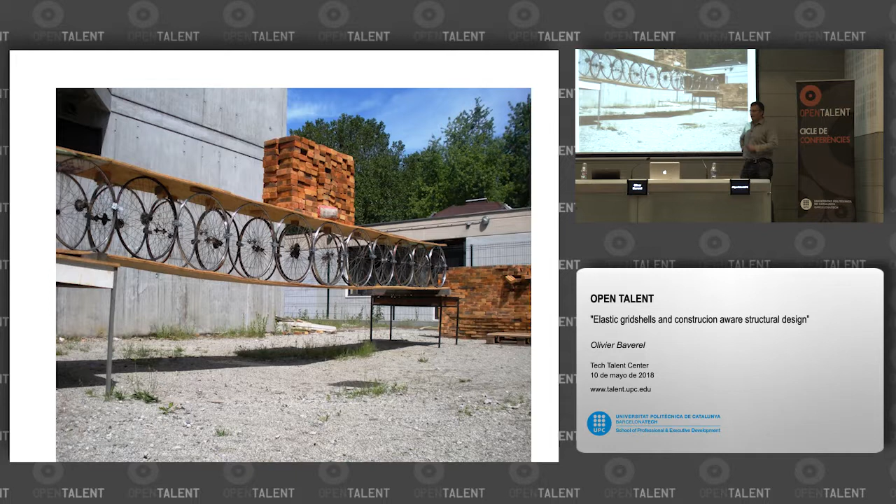Okay, so here's the team. I'm not alone. I have my boss, who is an expert in composite materials—especially, he made many finite element models of composite materials. That's why we've been able to do Gridshells. And here's Nicolas Roussel, who is an expert in concrete making, and Laurent Hauswirth, who is a mathematician that helps us a lot with all the mathematical problems we have. And Cyril Douthe, who's a colleague. Romain Mesnil, who's a former PhD student, and all the others are PhD students.

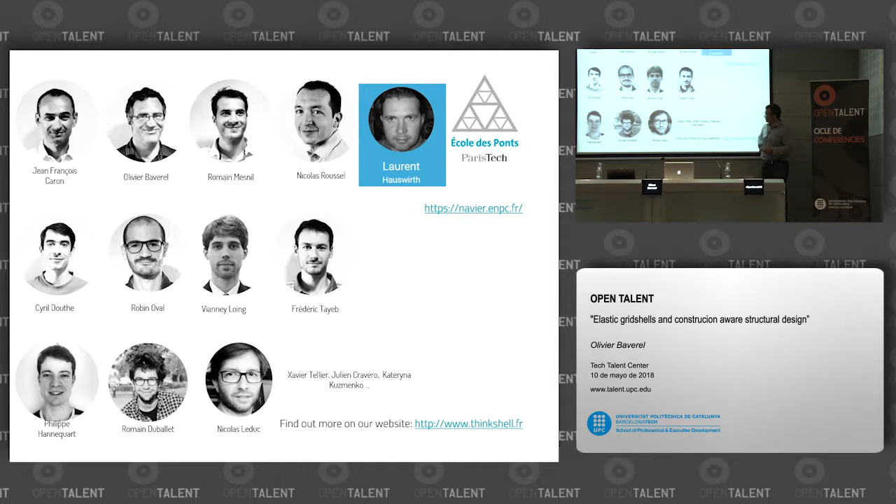So if you're interested, you can follow us on ThinkShell. And also, for those of you who don't have access to all the networks of papers, there are many papers on ResearchGate. So please go and have a look. So it's finished. Thank you.